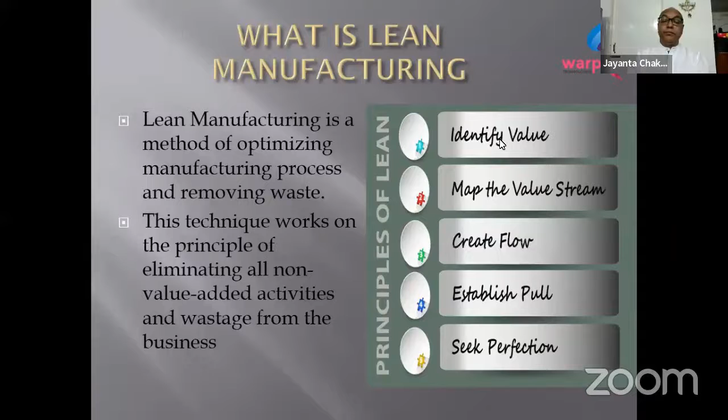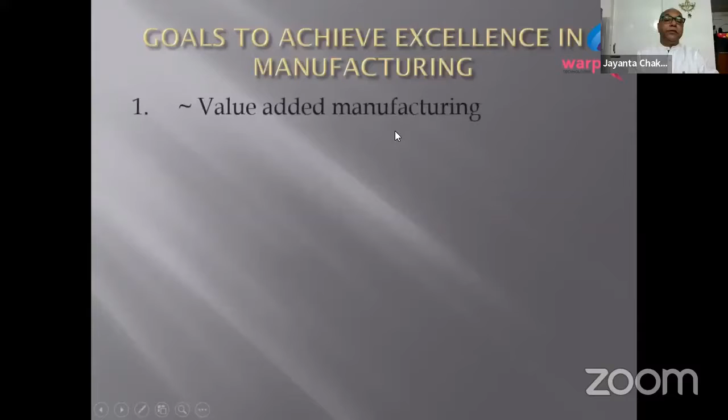How do you get excellence in your manufacturing process? If you look at value-added manufacturing, what you do is manufacturing with a continuous improvement approach.

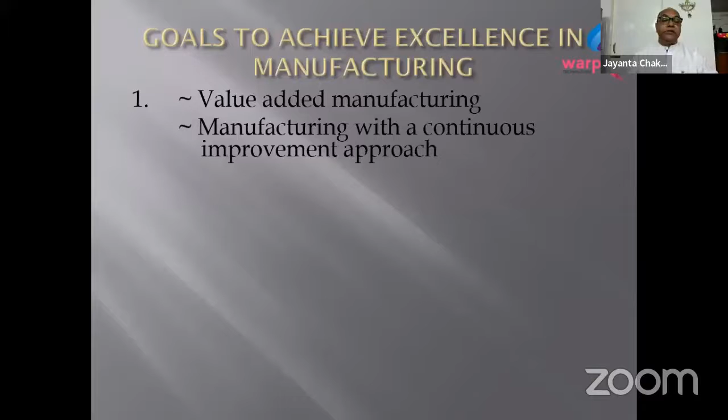In the automobile industry - because lean came from the age-old auto industry, and the leader was Toyota of Japan - what they did is they never stopped or became happy with what exactly they are doing. It's a continuous learning process, a continuous improvement process, and at the end of the day you get better and better and superior results. So that is how you add value in the system.

And the second point is the inventory should come down. What is inventory? That is the stock you are holding. They have implemented the JIT approach - just in time - where the inventory you are holding is zero, but there is no stock out. The entire value chain or supply system is so strongly built that whenever you need material, it is available at your gate, but you are not stockpiling in your organization.

And the advantage is reduction of your working capital. Ultimately, what we aim to do is give the best product at the most reasonable rate, at the most appropriate time, to your customers to make them happy. These are the three things which always come to mind when you do value analysis or value addition in your supply chain or manufacturing system.

So fundamentally what you do is establish or streamline your resources in such a way that the streamlining attributes to cost reduction - less movement, less effort, less tools utilized, a single machine doing multi-purpose jobs, and so on. This is one value chain where you streamline your manufacturing system, and the other is your inventory, where you are incurring cost to your organization. More the inventory, more is the cost, because working capital is always borrowed, and the interest cost of that working capital is your cost, which is irrecoverable.

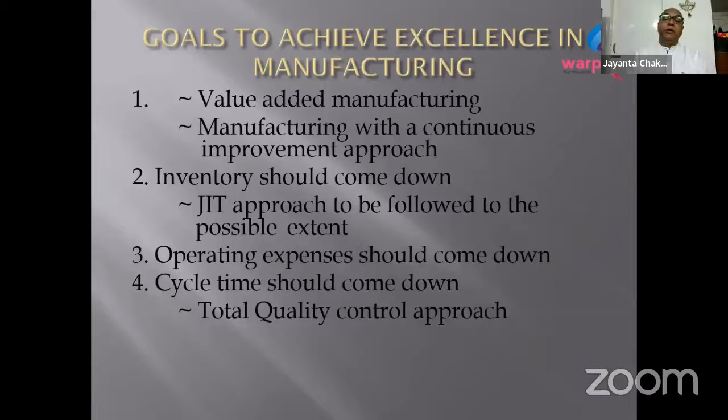Operating expenses should come down. How? Cycle time should come down. How? There are various methods which I'll be explaining over the next few slides, showing how you are going to streamline or downsize your costs by implementing certain techniques and philosophy.

And at the end of the day, the yield should go up - that is, your productivity should go up, so that you are utilizing your resources to the best possible extent, your cost system is low, and your productivity - production per hour per machine - is more.

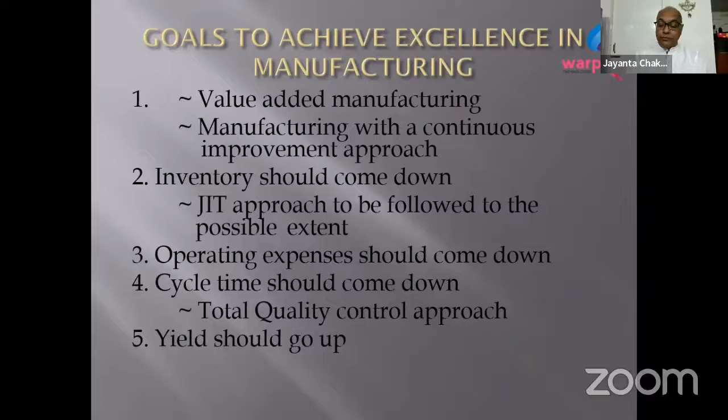What are the systems and tools for lean manufacturing?

There are certain theories which I will be sharing with you shortly: the concept of value chain by Porter, Scheer's integrated information system framework, information management tools, business integration and decision support tools, ERP and SCM, material processing and handling tools, and lastly the cellular manufacturing system, which is now the most important activity which all growing organizations are following in manufacturing environment.

So let's start with value chain by Porter. His concept is very clear, and it is called transformation. That is, what you are doing in a manufacturing system is you are inputting the raw material on one side and getting the finished goods at the other side. Porter said this process is called transformation. That is, you are buying iron and you are getting a utensil. So you are transforming iron to utensil through your manufacturing process.

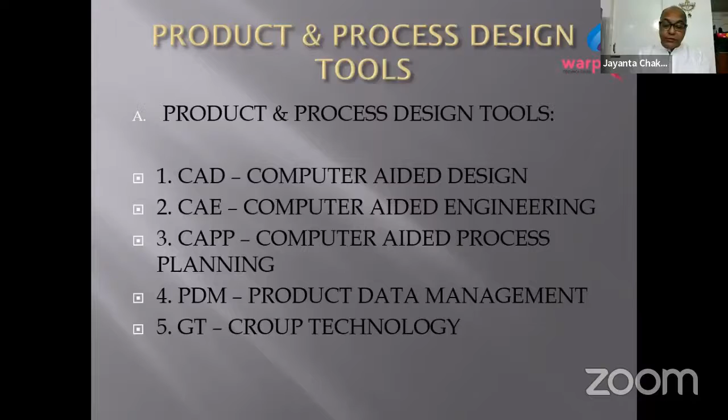Let me explain it in a schematic diagram in one or two slides later. Before that, let's understand what are the lean production tools. That is statistical quality control, SQC, barcoding system, and decision support execution and business tools are manufacturing resource planning, that is MRP2.

In MRP2, again, I'm coming back to the same old MRP system which all ERP uses. MRP2 is nothing but it is helping you to take a make or buy decision, which is very important for lean supply chain management system. Why?

Say for example, at the end of the day, you get your total master production schedule for the entire year, and then you started analyzing what are my different areas, like what is my total raw material requirement, what is my total plant and machinery requirement, and what is my total budget financial requirement. So what you do is you explode the entire thing with your BOM, bill of material.

Then you started analyzing what is your production capacity per month, how many units you can produce, and what is the target. So you break up into target and manufacturing capacity. So there will be something like plus or minus. If it is plus, minus, it's okay that you are still capable of manufacturing.

But if the monthly target is more than what you can make, then what are you going to do? Are you going to buy immediately on your plant and machinery? Who gives you an assurance that next year your budget will be this? It may be more, it may be less. Then the entire pressure comes on the supply chain guys. It comes to the HOD, materials management. What his role is, he then tries to locate who can make these materials in different places.

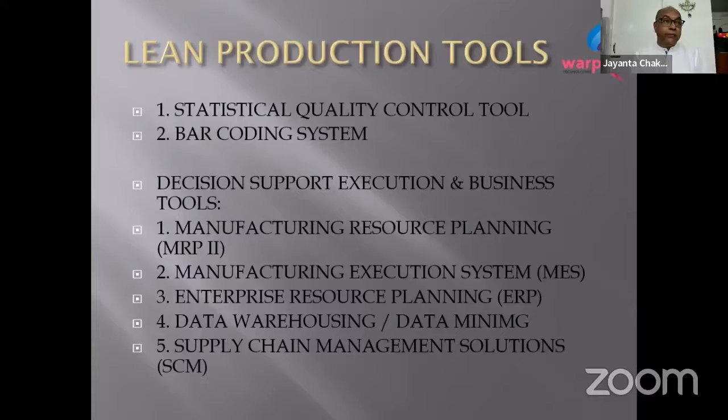So what you do is, again, you are outsourcing. You are buying some space in the cloud, and you are warehousing your data, and then wherever necessary, you are retrieving or data mining. And finally, the apex part is your supply chain management solution, which gives you the streamlined flow of incoming material, outgoing material, inside movement and all.

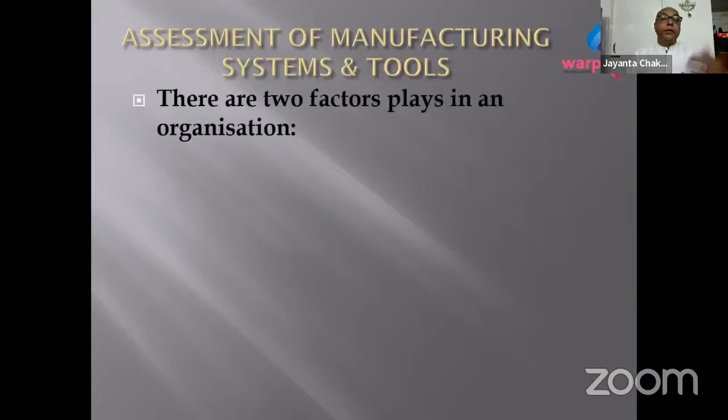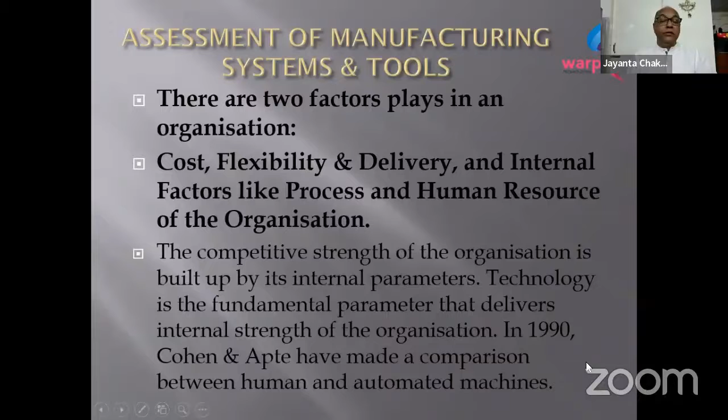There are two factors playing in an organization: cost, flexibility and delivery, and internal factors like process and human resource of the organization, which I have explained to you. And the competitive strength of the organization is building up by its internal parameters. Technology is the fundamental parameter that delivers internal strength of the organization, and the concept.

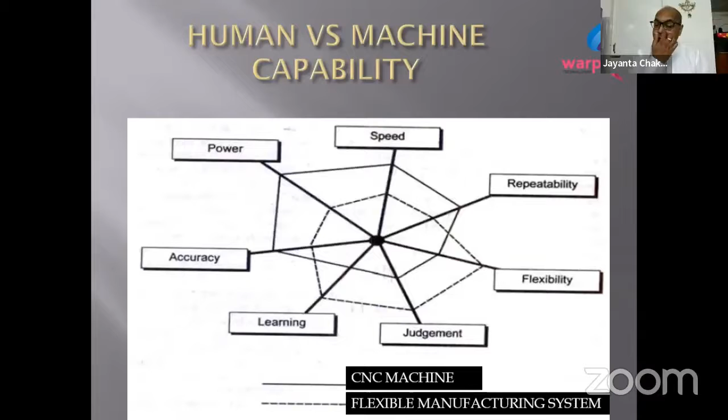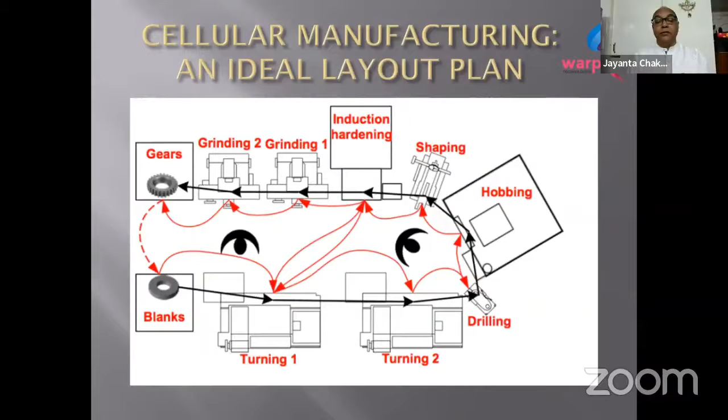Now I think the concept of cellular manufacturing and group technology is understood, and this is where the entire efficiency of your value chain lies. The supply chain mechanism of this particular process is minimized to the fullest extent, so that the man-machine operation processes are streamlined and no further improvement can be done. Of course it can be done, which I'll be coming to later.

Now I am coming to a very important topic of today, that is why lean and what do we do in lean. There are 8 wastes as per JIT. 8 wastes. The wastes are waiting. Waste means cost. So whatever you do, the wastes are cost. So what are the cost implications? One is waiting. If it waits, then it is a cost implication. If it is excess motion, it is a cost implication.

If it is unused capacity, it is again a waste, because you are exhausting your value chain by doing nothing. Defects are the enemy of your value chain. Excessive inventory, you are blocking up your working capital. And then overproduction. Of course, overproduction is a waste.

Because with overproduction you are converting from raw material to finished stage without knowing what am I going to do with this product, because you do not have an order for it. Okay, so if you do not have an order and you are producing, then you are wasting all the resources, because you do not know when this product will be converted to FG, that is finished goods, I mean sale. If it is not sold, then it is your raw material cost, your value added cost, and your interest cost. So all costs put together come into this.

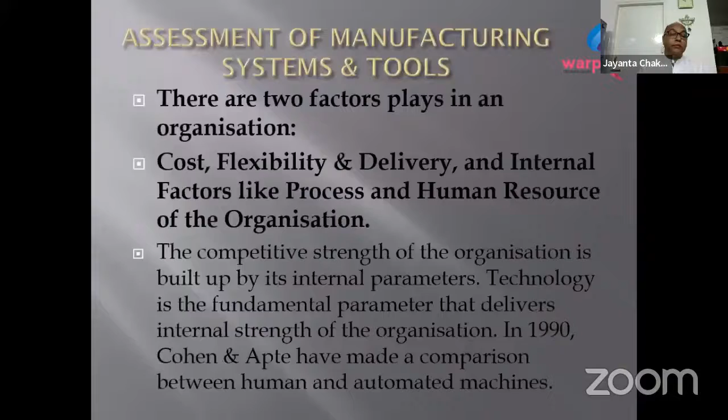So we are talking about 3M, 5S, Kaizen, Kanban, TPM, JIT, and TQM. These are all known facts, but what I intend to explain is 2 points before I conclude: VMI and EDI. VMI is vendor managed inventory. For the entire span, I'm talking about the collaboration between the buyer and the seller. The collaboration is so important in today's date that you can reduce your inventory.

You can definitely go for JIT, and you can definitely enter into a lean manufacturing system if you have got an extremely good supply chain management system and extremely good vendors. And believe me, you should always look for one more vendor. Please do not be very happy with your existing vendor, because the entire globe is open for you. It's not only the local, it's an international market.

Now the whole country is thriving with lot many things; the semiconductor is a big challenge for all the automobile industry. Now what they're doing, they are trying to manufacture it in India. They are trying to get that technology. So this is a collaboration. This collaborative approach to vendors is important. Like in the automobile industry, they call it VMI, that is vendor managed inventory.